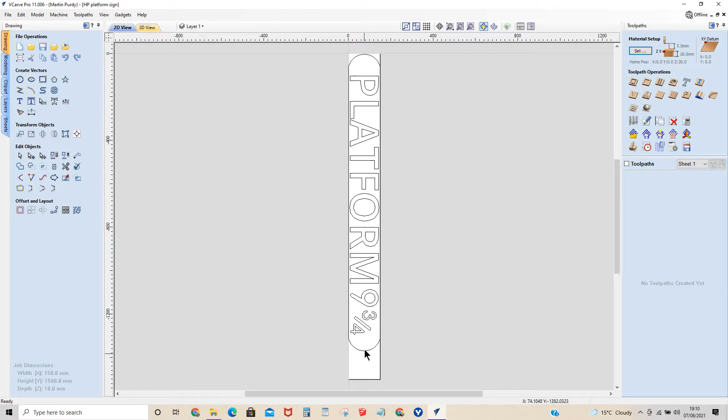What I'm actually going to be using is a piece of wood effect anthracite coloured MDF 18mm plinth left over from the kitchen. The offcut I have is 1500mm long, and the sign we're actually making is 1364mm end to end, like that really matters, and the letter width is around about...

So I've saved you - see what's going on there. As you can see, 21.97, so it's thereabouts 22mm letters, which I think will look quite nice. And we're left with around about 10mm space at the top and bottom of the actual plinth.

And the tool path I've asked for is just going to come around and clip the edges of this plinth. So what I may do is make this fractionally bigger, just so it doesn't quite touch that plinth.

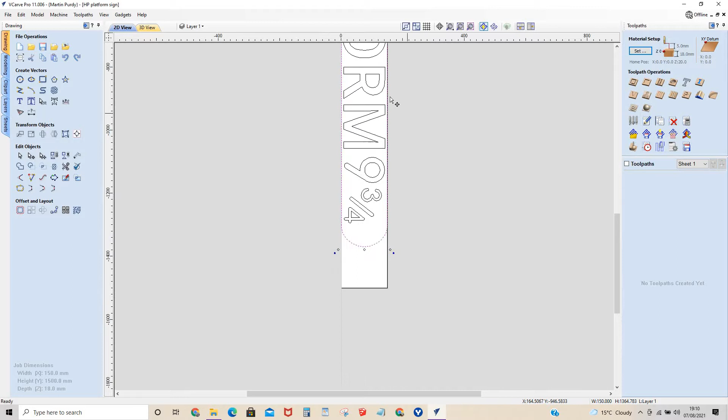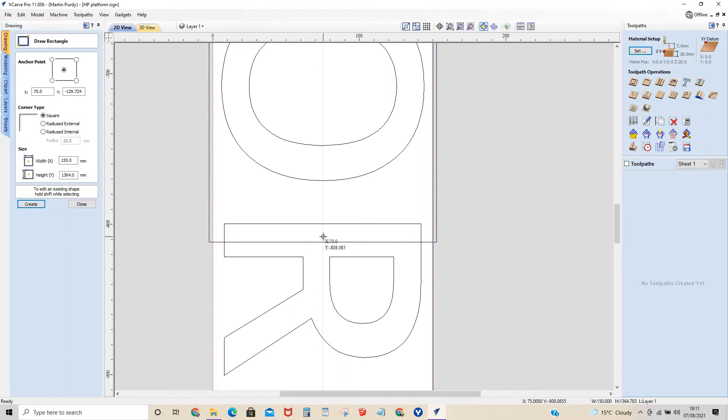So what I've done is selected just this square section, and I'm going to go back into the square generator. So originally what we were looking at ended up as 1364mm, and I want that to be 155 across the x-axis. So if I press create, that's given me a whole brand new square. Right, okay, so we can work with that, that's not a problem.

Oh, I always end up doing this - close that, delete that one. I don't know why now, it's selected this one, it's not just actually applying it to this shape. It probably has something to do with the radiuses. I want a 75mm radius.

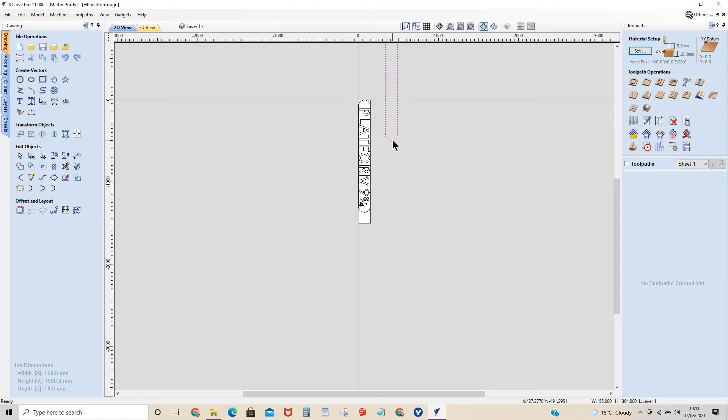Then what we can do is select this, hold the shift key down and select this one as well, open this up, and now we will center the two together. You notice our new one is fractionally bigger than the big one. Select that, press delete, and that is our new tool path.

So if I ask it to cut on the outside of the sign, what we're actually going to do is miss this by sort of 5mm, and I think we can probably get a bit better than that. So let's go back to the square status. Now you notice it states apply, so I can actually apply whatever we're doing to this.

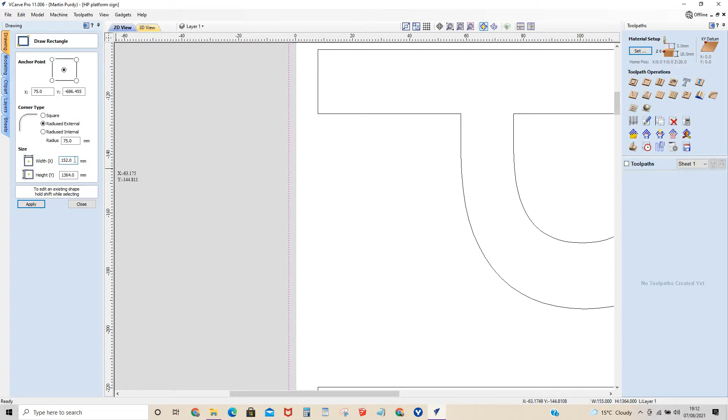152.5 - there we go. And the fact that it's centered, that should have auto-centered off of the sides. So we're going to bypass these sides by 2.5mm. That will give us an ever so slight angle on the radius here.

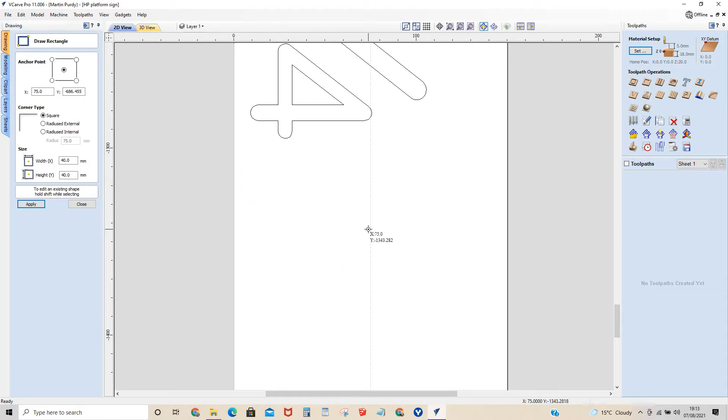But the reason I've done this is we're going to have some holes at either end, just to mount this. So that's the only real last part of the toolpath I need to do. What we'll do now is make that, say, a 40 by 40 square edge, apply - oh, I know what I've just done. 40 by 40, create that there. What we can do is use that 40 by 40 just to give us some sort of space in regards to where our holes are going to be.

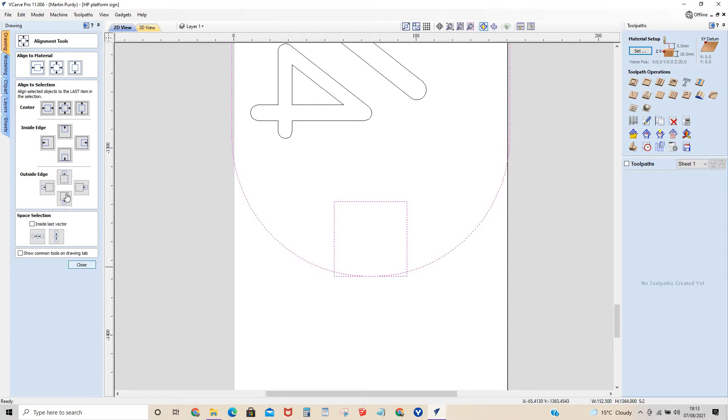So what I want to do is generate a hole somewhere in the diameter of about 5mm, and we'll create it there.

Okay, so I can actually zoom all the way out now. I've created that hole, I've selected our square, and hold down the shift key, select the outer circumference, hold this one, and you notice that's just pinged it straight up to the end, matching exactly where I wanted it.

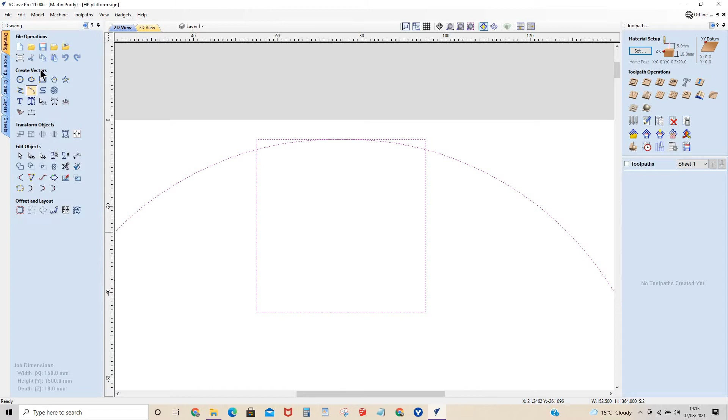Now again, we've got the circle, we've got a 5mm hole. You notice the snap feature is bringing us up this little crosshair with the dotted line running through the center of that square. So I press that, and again it's going to give me that hole perfectly spaced.

Okay, so I've got a perfectly spaced hole down here, perfectly spaced hole down here, and the only thing I can see is where we've shuffled around with these squares, it has slightly knocked all this out of center.

So what we'll do is we will select the outer circumference, we will select that little 5mm hole, press G for shortcut on the keyboard, and to be honest, all it really took was just to bring it in just one click maybe.

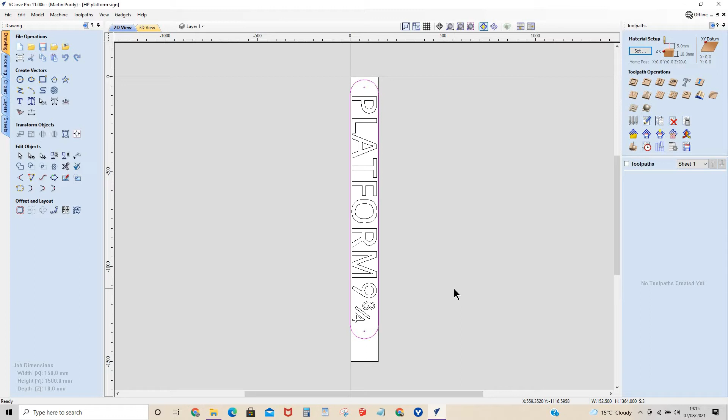So you can hold Control, and Control will give you some very fine movements as you press up and down on the directional arrows on your keyboard. You can hold Shift and that will give you much bigger passes, or you can just hold the arrow and press the directional keys, and that will give you some medium passes. But I think sort of at face value that looks pretty good, so I think we'll go with that.

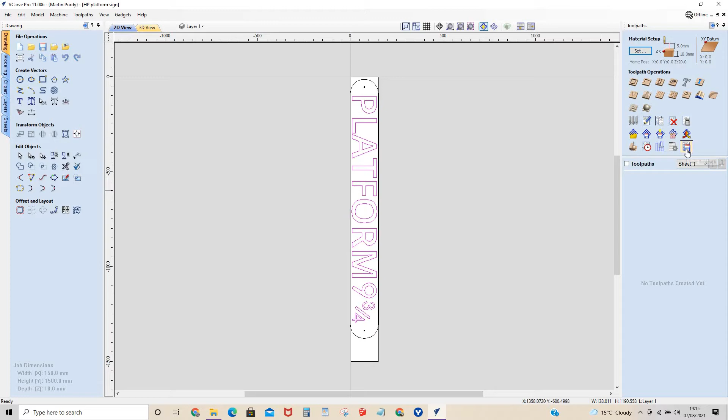So what we've got left to do now is actually generate the tool paths. Now this is where I've been having the most amount of problems with Vcarve Pro. What I'm finding is you actually have to create a toolpath, save that off as one toolpath on its own. So every single operation is one toolpath on its own.

Whereas I used to be able to say create like a bulk amount of toolpaths for anything that had the same tool, whether it was profiles or pockets, it didn't really matter. Whereas obviously now I'm noticing that I'm having distinct issues.

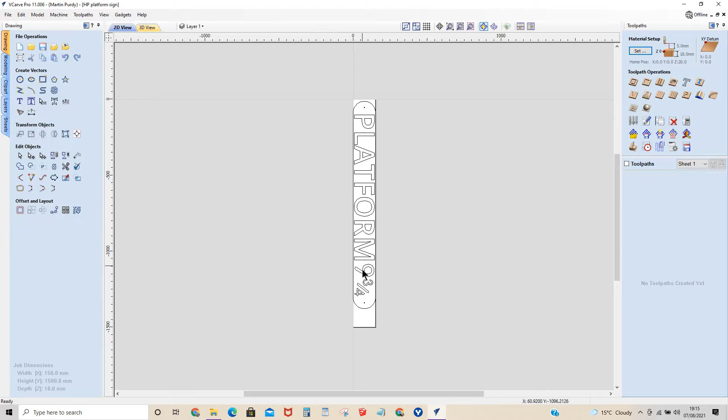So we know we've got the thinnest part. Just measure that off here, there to there - 7.59, so just shy of 8mm going across here. Something like a 5mm cutter would work out absolutely perfect.

But what we're actually going to do is we're going to V-carve this into the MDF. So if I select all of this, which I've grouped all these items together using the shortcut G on your keyboard, I'm going to go with my trusty Trend Rota-Tip, which is a 90-degree V-carve.

Okay, we've got a spindle speed of 24,000. I'm happy with that. Feed rate, I'm going to go for 1200mm a minute feed rate. I've heard of people going a lot higher.

The maximum diameter across this cutter is 17mm. Like I said, the angle actually works out to be 90 degrees, so it's 45 degrees to the center of the cutter, 90 degrees going that way. Final pass will take off 0.34.

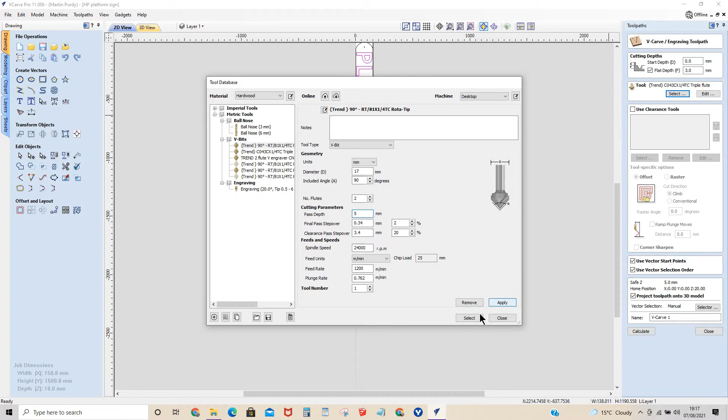I'm going to take a maximum cut depth - let's change that to 5mm. Okay, so we're going to apply those settings to the cutter, what we've asked it for. We're going to press select. So, in theory...

We can now look at the idea of creating a clearance pass. Now, for that clearance pass, I'm going to hog the majority of it out with a terribly cheap straight 6mm by 20mm Toolstation twin fluted router bit, basically a very cheap router bit. Don't mind if I snap these, it really doesn't bother me. So that's a 6mm in diameter, 2 flutes.

We're going to go for a cut and pass depth of 2.5mm per pass, I think that's fine. Step over 2.5mm - so again, let's change that to a 50% step over, because the V cutter is going to come in and do all the nice cleaning up. So maybe we can even push it to a 60% step over, 3.6mm. Spindle speed of 23,000.

And a feed rate of 1200. Now from experience I'm going to lower that to 1000 because I can always adjust it up slightly on the machine. Okay, we'll apply those settings and select that.

So what we should have, when we press calculate, is 2 separate tool passes. What we've got here is I want a ramp, with a 10mm feed into the ramp. As the cutter comes into motion, it's going to travel across this way, then come down as a ramp into that. Slightly slower, but for the type of cutter I've got in there, that's much happier. Okay, so I think we're pretty much done.

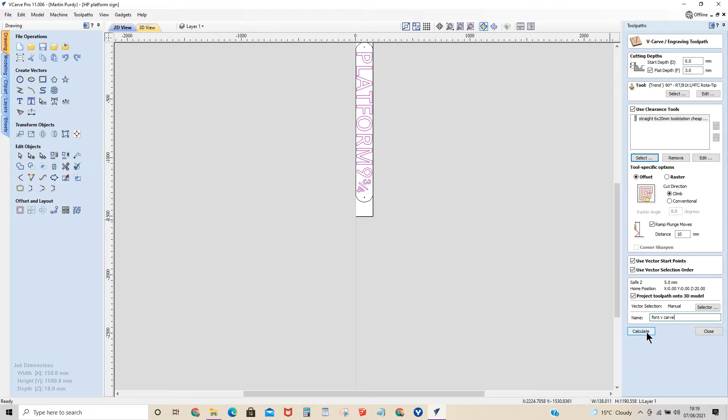So font Vcarve is what we will name this. We press calculate, and that's going to give us two distinctly different carves. So if we look at just the clearance pass, we'll reset that, and ask it to play.

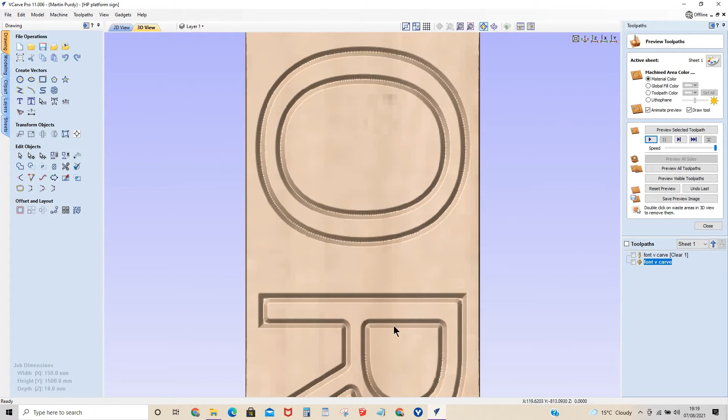That's effectively what it's going to look like. So I don't know why it's not going to touch the center, unless maybe that is a pocket. We'll have a look at the Vcarve itself, and press play on that.

Preview all toolpaths. Okay, so that's going to give us that 90-degree piece in the bottom, and for some reason we've got a flat bottom on here, so let's go and have a look.

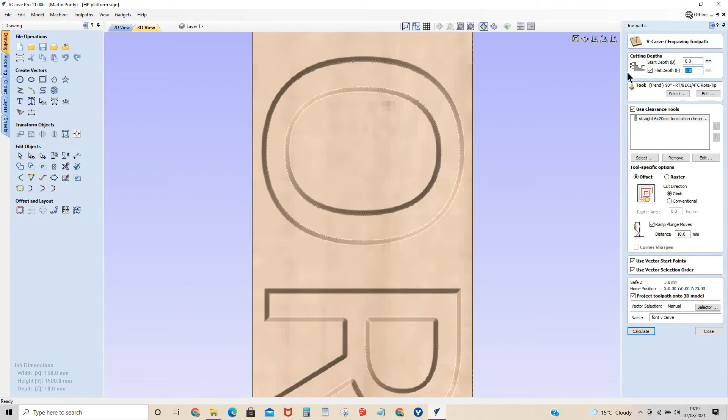Flat bottom of 3mm. So let's take away the flat bottom, and it will probably tell me that the material is not thick enough. Oh, I don't know, it's only 18mm stock, so let's just make sure.

I mean, that looks pretty phenomenal, let's be honest. So let's just make sure that we've already told it that it's an 18mm thickness. Okay, so the fact is it's accepting that at no flat depth.

So let's have a look. Let's have a look at, say, creating a flat depth at 15mm. Let's see what that does for us. Let's zoom right in here.

So I wish there was a way, unless I'm being completely daft, but I wish there was a way of it telling you what height, sorry, what depth that's going to end up with. Yeah, couldn't tell you. Okay, so we're going to calculate that.

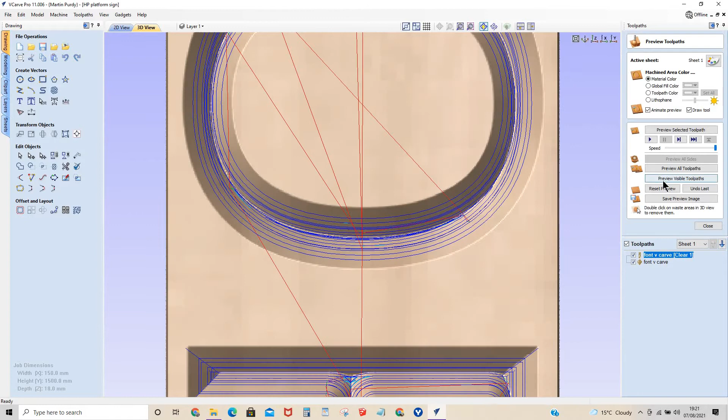So if we press play and ask it to show us, I mean, that's pretty cool, eh? Pretty cool. Right, so what we're going to look at next then is we go back to the 2D plan.

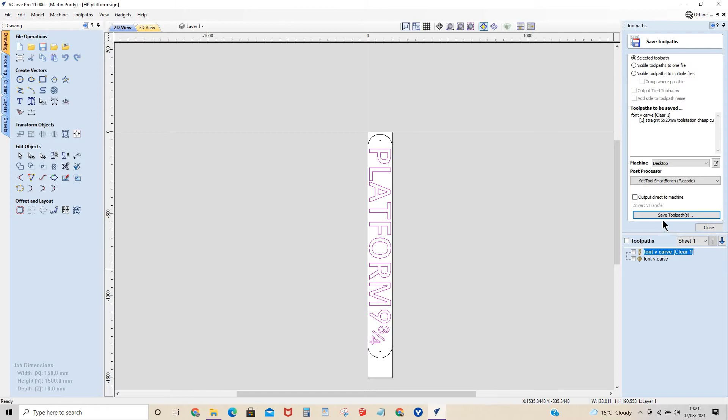We're going to have a look at, in fact, let's save that as a G-code. Save that off first. We'll have to, again, save these as two completely separate files. So CNC plan, G-code files, new folder.

No. So I'll just save it as platform. Right, so we've got font Vcarve clearance, clear 1, and on the end of that we will put, if I can spell right, font Vcarve clear 1 platform.

And that's what it will look like then when it goes over to the Yeti. And then we'll save this toolpath, and then right, hang on a minute. I think because that was blue, that's the bit it's actually going to want to save. And this, I think this is where I've been having the problems.

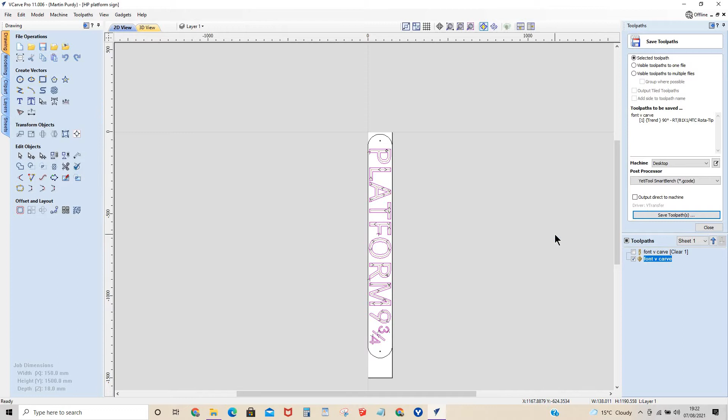So font Vcarve, yeah, font Vcarve platform, save. Okay, this is a one-off sort of piece. I'm not going to be replicating this, so I'm not too worried about adding in all the tools and all the rest of it, because it's enough that I can remember.

So we've got a 6mm cutter here, and the first thing we're going to do is group these toolpaths. Okay, I want to select, hold shift down, remember I've selected one. I need to hold shift down now and then select the other, and you'll see now I have both of them selected at the same time. Okay, I can press G and you'll see that they've changed now to a solid line because they're grouped together.

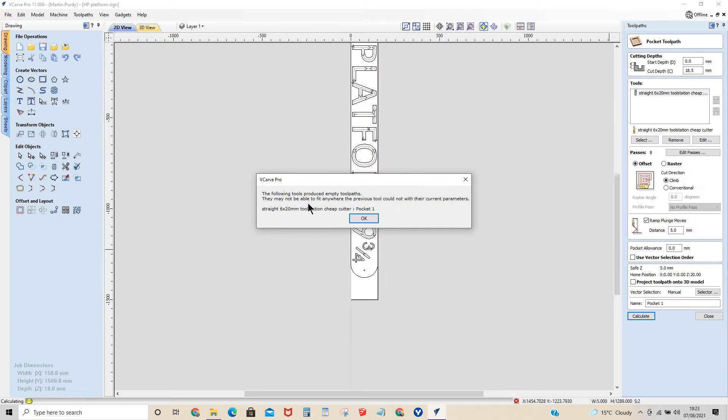Okay, now for this toolpath I'm going to be doing inside the line. How is this going to work? I'm just going to do it as a pocket, 18.5mm deep, 8.5, use that straight cutter. See what it says: the following toolpath... no, it's an empty toolpath because I've asked for a 5mm hole and I've got a 6mm cutter.

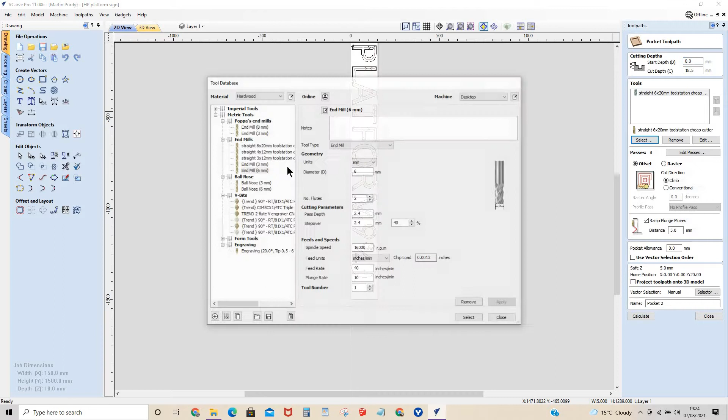Oh, I know what I've got - I've got some 4mm cutters. Let's go for... make sure I still got those selected. Yep, so I'm going to go for a pocket cut again, and I'll change that to a terribly cheap Toolstation, absolutely terrible cheap cutter in a 4mm. We'll remove the 6mm from here. It doesn't matter what sort of type of cut.

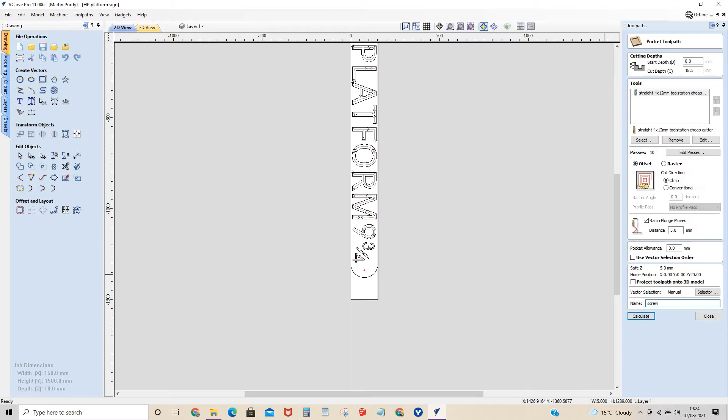And yep, we want it to cut for our material. That'd be ideal if you could. So we're going to take away all of these. Okay, and then we're going to press save on this toolpath.

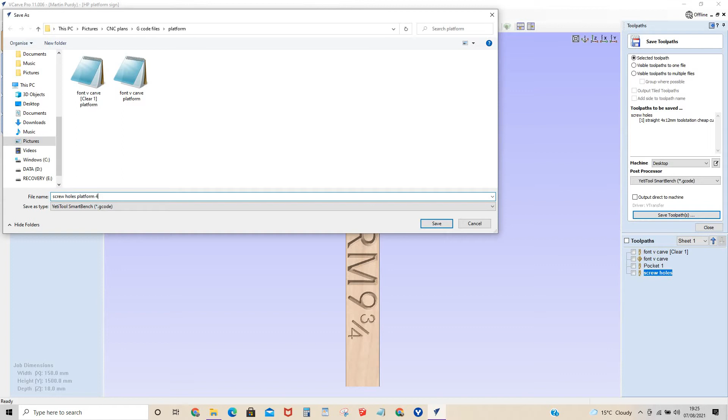Now we've got screw holes. And I'm going to put 4mm on there as just a reminder to change over to a 4mm bit. And the last toolpath is going to be this outer cut.

So we want that as a profile cut. We're going to cut on the outside of the line. We are going to do that as a climb cut, so we'd be cutting this way round instead of a conventional which goes this way round. We are going to add some tabs.

So I've been having, again, a lot of issues with tabs in regards to thickness, and I think I've just noticed what the problem is - 3D tabs. That's where I've been having the issue, because it gives you such a tiny little bit, especially something soft like an MDF, it's pointless. So, thickness, length of unselected 3D tabs.

We're going to ask it to edit tabs. Do I need them 10mm thick anymore on a 9mm? So let's go for, I don't know, 8mm, 15mm length, who knows.

Right, edit tabs, and I'm going to add a tab, tab, and tab this end. Okay, so I've got a fix in here on my board, and I've got a fix in here, just sort of fixed into the spoil board. So again, we're going to go tab, tab, and tab. Hopefully, like I said, screw up here into my spoil board, and a screw down here.

Okay, so that should be enough then with those 3 tabs just to keep that in place while it does the profile cut. Do a separate last path. Why not? Allowance, say 0.3 of a mil. Okay, and this would be outer edge cut.

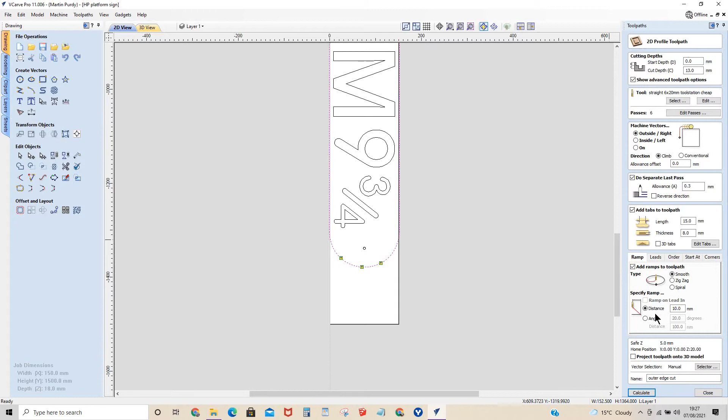Okay, so once you understand all of the different sort of features that Vcarve has, you can really use it to work in your advantage. Oh, one thing we didn't look at was the depth of cut.

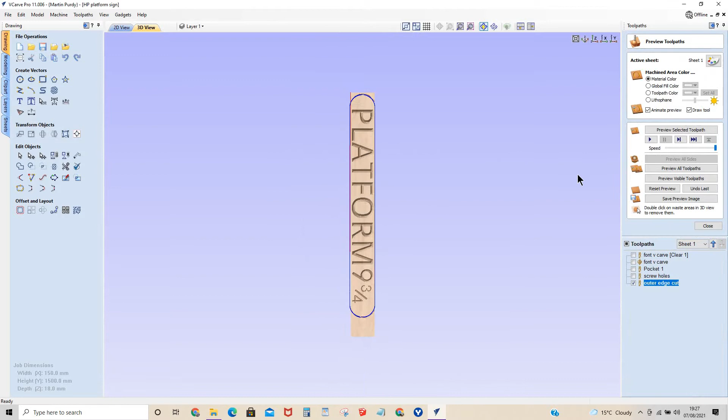18.5 is what we'll go for. Yes, it will cut through my material. That's exactly what I would like. So what we can do is we can select all the toolpaths here.

Okay, so that's the one I've pressed there. Oop, yep, that's the one I pressed there. I always press reset preview. What we can do is we can press preview all toolpaths, and it will run us through all the toolpaths.

Now, if I didn't have any tabs, what I can actually do is double click on the waste, and it removes the waste for you, so you just see physically what you're left with. So on a big project covering a lot of screen, that'd be fantastic.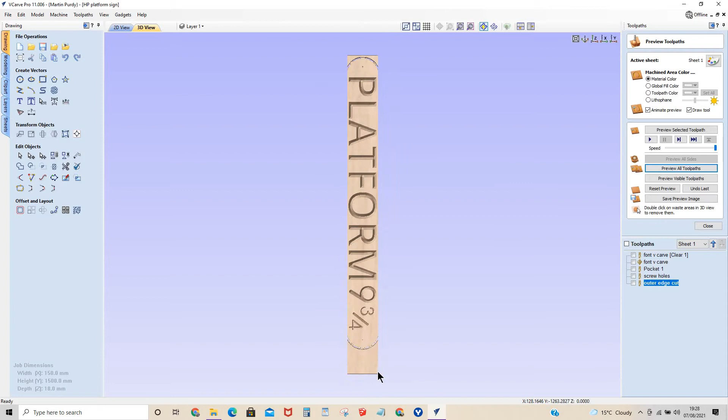But anytime you add tabs, you click on it, you get this warning message. The warning message is basically saying - I find it so difficult to zoom in from this preview. So what it's actually saying is that these tabs... let's see if we can pull this round a bit for you. There we go. Nope, still can't zoom into it.

These tabs here effectively are creating a bridge, yeah? But that's what our sign's going to end up looking like. I hope the lucky person who gets it is going to be happy with it. It's something I've just kind of really made up on my own.

So now we're going to look at saving this toolpath. Yep, so I've selected that in blue. Now again, I can't seem to get rid of this blue. I don't know if it's something I'm doing, something I'm not doing. I don't know, but I can't really seem to get rid of this blue. But what I'm finding is whatever is selected in blue... okay, all sheets, I don't know, can't get rid of this blue.

No matter what you select here, when it comes to saving off your toolpaths, you can select all three and what it'll actually do is save 3 individual toolpaths, all doing that, and that's it. I can't get rid of it, so I find it really frustrating.

So what we're going to do is select what's pocket 1. What was pocket 1? Got screw holes, got outer edges. Pocket 1 - straight 6mm deep toolpath. Close.

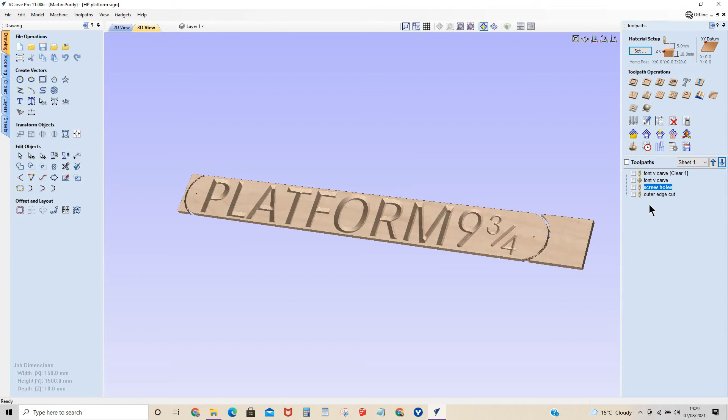I don't think we're using that. That was the one that had the hollow toolpath for drilling a 5mm hole with a 6mm bit. So outer edge cut - this is the one we want.

I will tick that, but at the same time I've got it saved there in blue. And we're going to go to save toolpath again. Now what we're going to go for is outer edge cut platform. So when it goes over to the machine, I'm looking for all the ending text - it's in platform, but obviously this one. And I'm going to be doing it in the order of Vcarve clear, Vcarve, screw holes, outer edge cut.

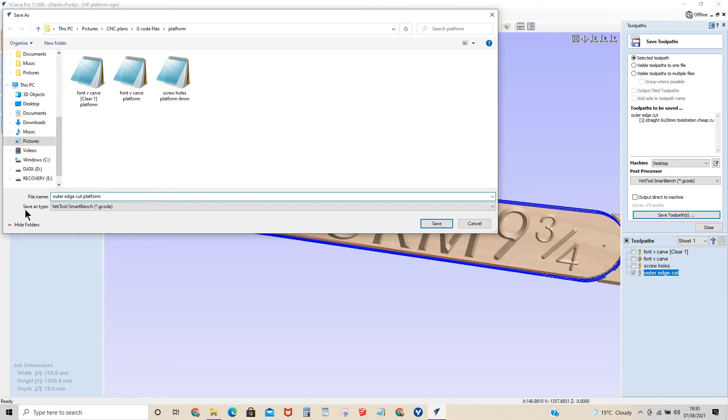Okay, so Yeti comes with this fantastic piece of software, which is their transfer tool.

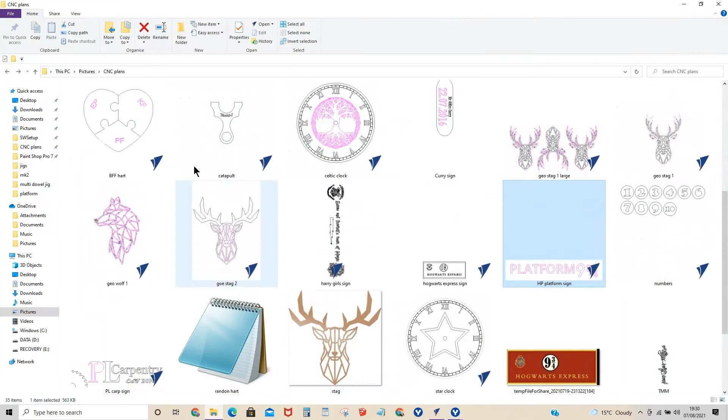Okay, so I'm going to select my Smartbench. What it does is it brings you up this screen here. I'll go into my G-code files and platform.

And what you can actually do is select, holding shift down, using the directional arrows on your keyboard. I'm going to select all 4 toolpaths and drop them into the transfer window. And what you'll find now is all files have gone across.

Now that I've recorded, you can hear me talking, that I've recorded in real time, so you can see how fast that's taken across. In all fairness, they're all very small files - they're not big files, but that's taken across very, very quickly.

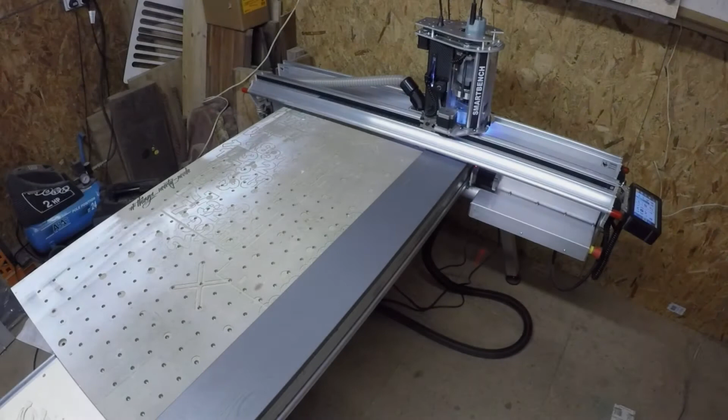Hey guys, so we are over at the Smartbench now. Going to be looking at cutting the platform 9 3/4 text into this wood effect plinth. I don't know if you can see it - it's a foil wrapped MDF. Has actually got a stamped wood grain effect in it.

It's really nice stuff actually. And then what I'm going to do is paint these outer edges once it's done, just to sort of finish it off. So this is going to be our X and Y 0.

Okay, and I've already set the Z axis for the height, but I am expecting it to tell me that I've set this too high. So let's have a little look.

So I've set the beam, the X beam, 6mm off of this surface. So it's not actually in contact with the surface in any way, because I don't want the little wheels to risk marking the surface. So what we're going to do is come along here.

I'll just move you back slightly. We're going to come along here, and I'm going to attempt to position the laser. Now, I don't know if the camera can see it, so with my very shaky hands, I'm going to bring you across.

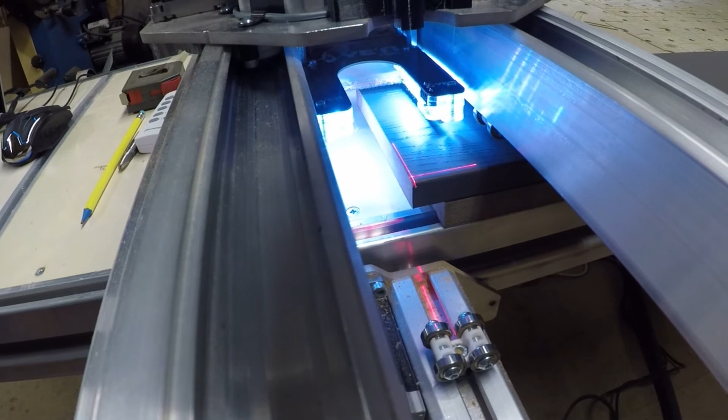Now, what we're looking for is this laser to be bang on to the outer edge. I'm pretty happy with that.

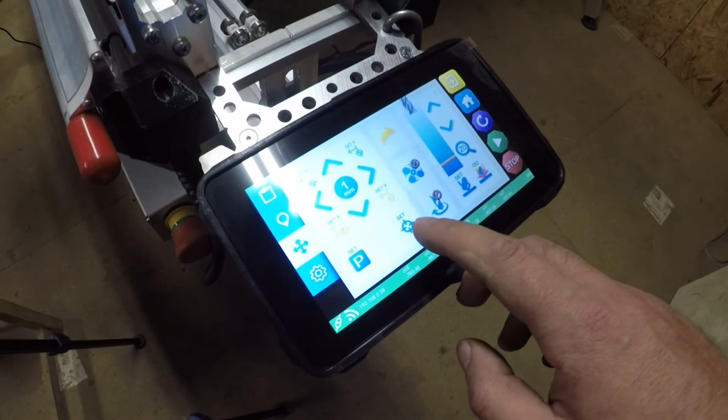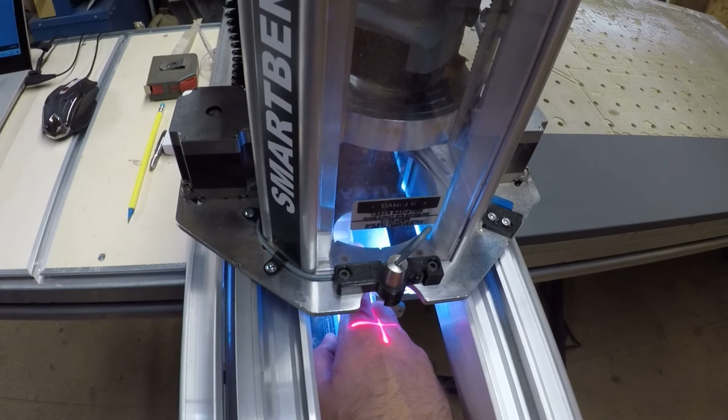Okay, and what we're going to do is press on the control panel, set X and Y datum. So what that's now done is it's brought the cutter over the corner. Don't know if you can see my little fingertip - it's brought the cutter over this corner now to the centre, now centre of our X and Y datum. So that's dead smack off of that laser.

I absolutely love the laser.

So we're going to go now into our files, and the first one we are looking for is font V carve clear platform. So we should, once we find them, find all of the platform files together, I should imagine.

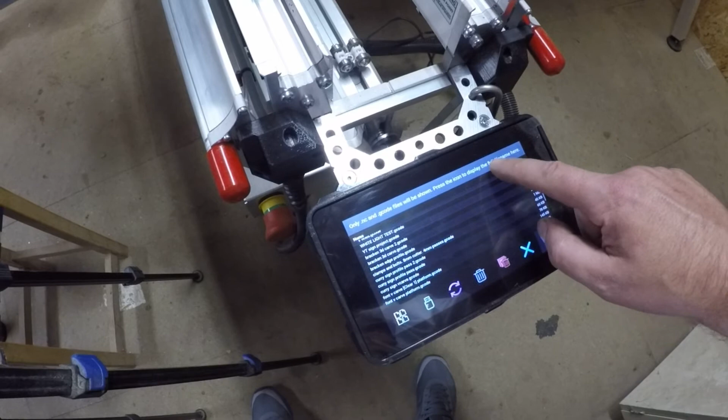This is all the files I've got on here. I need to have a bit of a clean out.

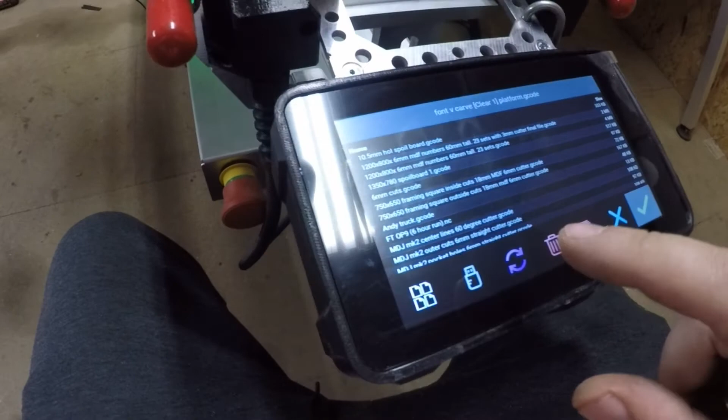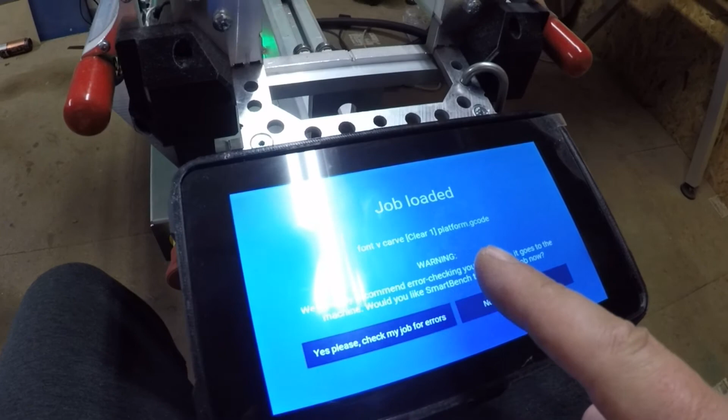Okay, so at this stage I found my file, which is the Vcarve Clear 1 Platform G-code. I'm going to press yes, that's a tick. Now it's preparing the file, and I'm going to ask it to check for any errors.

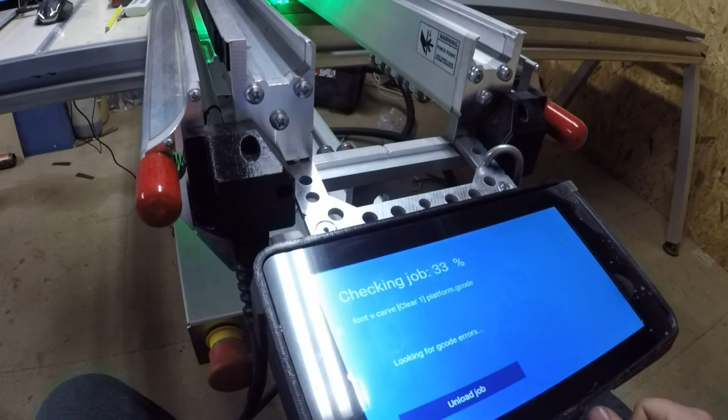Now on this file I didn't actually ask it to put the white light on, so we've still got the green light. Aaron and the guys at Yeti have managed to get everything in place for me to change all the lights to white, which I find a lot easier to see the cuts, and a lot better for filming. However, I'm not going to lie, I clean forgot to do it.

So now we've got the file loaded, I'll bring you to a screen here. I hope you can see that properly, where it's showing you where the workpiece is in comparison to the SmartBench, which I think is a brilliant piece of engineering in itself.

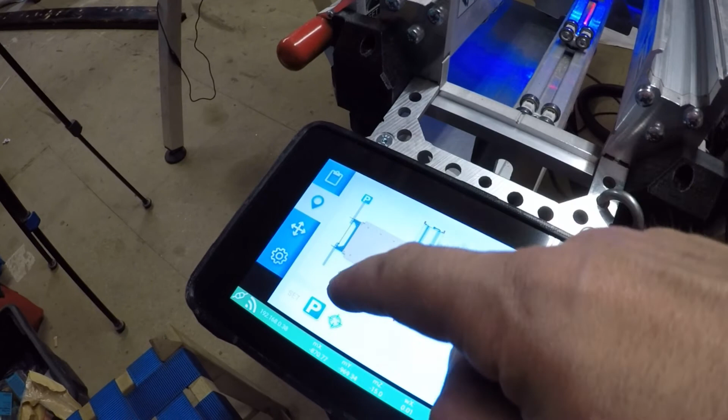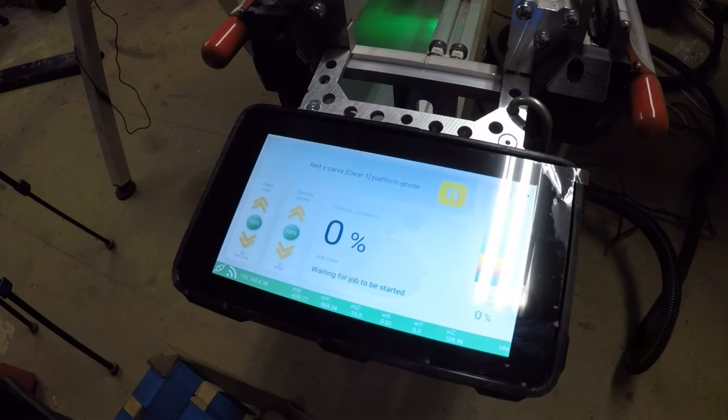So what we're going to do is press play down here to say we're happy for it to start, and we understand. Now we've got a depth of cut here, so as you can see we've got our feed speed and our spindle speed. We can adjust those up and down as the job's running. So it's just going to turn this off down.

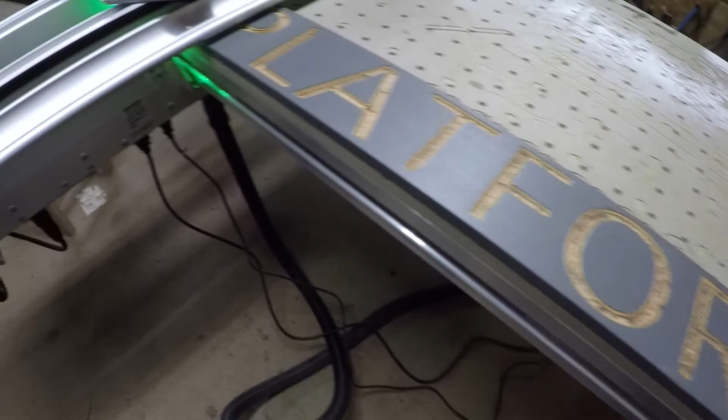So let me give this a little bit of a clean up, just bear with me, trying to do this one-handed. This is a cracking idea of mine, Hoover on remote control.

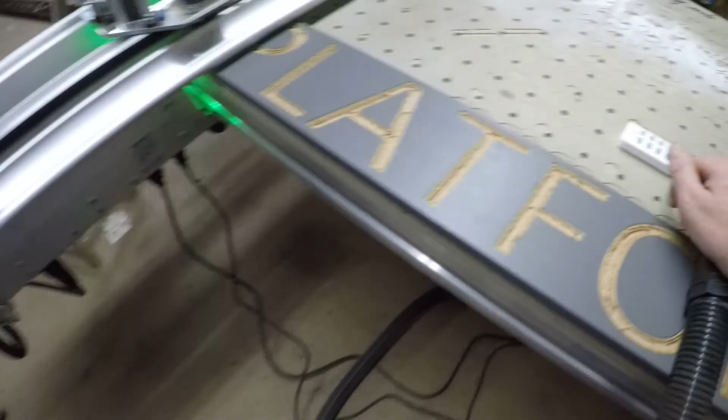There we go, there's the dust port connection for the actual Smartbench. I'll sort that in a minute.

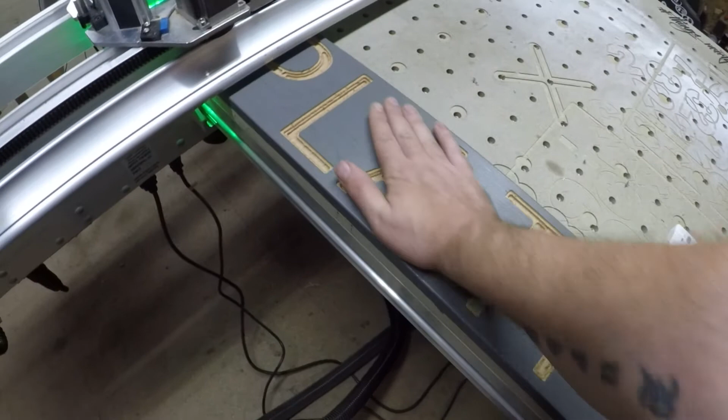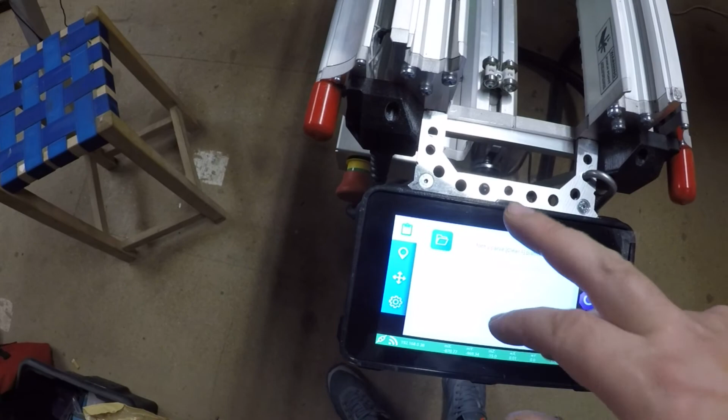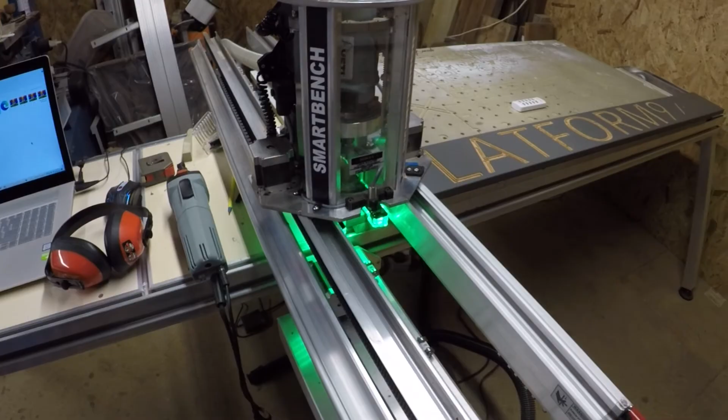So the console's telling me the job is complete, and then we can go back and load the next job. But before we do that, obviously I need to change over to the second spindle. This second spindle has got the Rota-Tip V-bit in. I absolutely love all these different cutters where you can replace the carbide tips. So bear with me one second, I'll just swap that over.

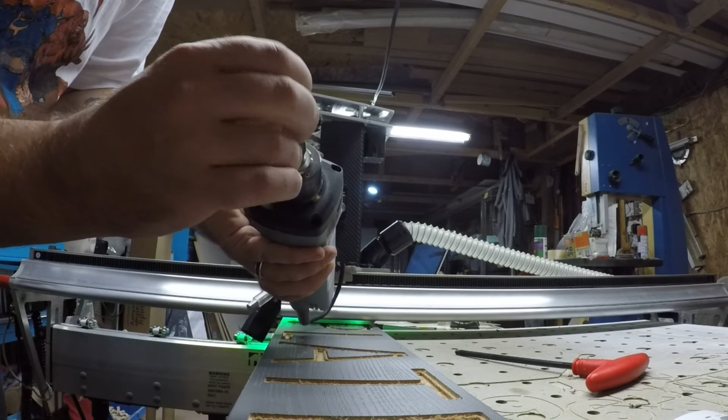So Smartbench comes supplied with one of the adjustable ball end type Allen keys, unplug the communication cable and the power cable, slide it out, and as promised, slightly burnt, terribly cheap, crap little twin flute cutter, but credit where credit's due, it's done its job. Done actually quite a lot of cutting with that cutter, I'm quite impressed.

So we'll drop the new spindle in. Turn it so the red button is in line with this beam. That means the vents can then breathe outside of the machine and keep it nice and cool. Do this up, and as Yeti say, when it gets to the point where you can feel it grip, turn a quarter of a turn past, and that's tight.

Okay, and that works out as so many newtons if you really care that much. Don't ask me how many newtons though, probably.

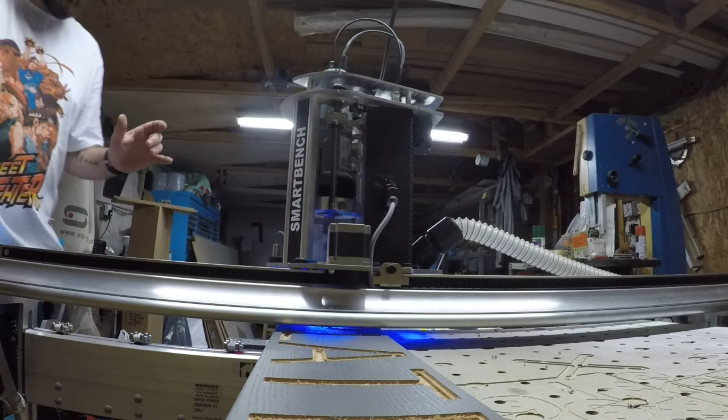There we go, so we just plug back in the comms cable and the power cable. Now at this stage you always have to remember you're going to have to reset the Z-axis because we've got a new tool, a different height. So we set it to infinity mode. Now one of the biggest selling points about Yeti to me was the built-in touch plate. So we bring the Z head down till the tool is fairly close to the workpiece.

Slide in the attachment then. That brings the cutter down fractionally until it touches the touch off plate, and that sets the height. Now even from there you probably saw the light flash green to say that it recognises this.

Now the only last thing I need to worry about is if I've got enough depth on the Z head and the tool to actually reach the bottom of these V-carves. So again, we come in, we select the file we want, which brings us to the tiny writing that my chubby fingers struggle with.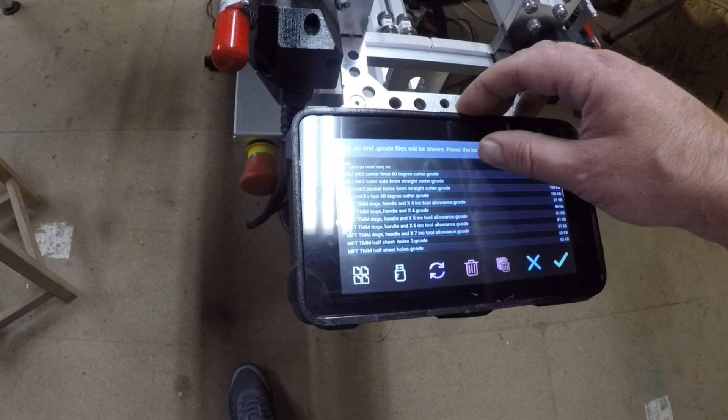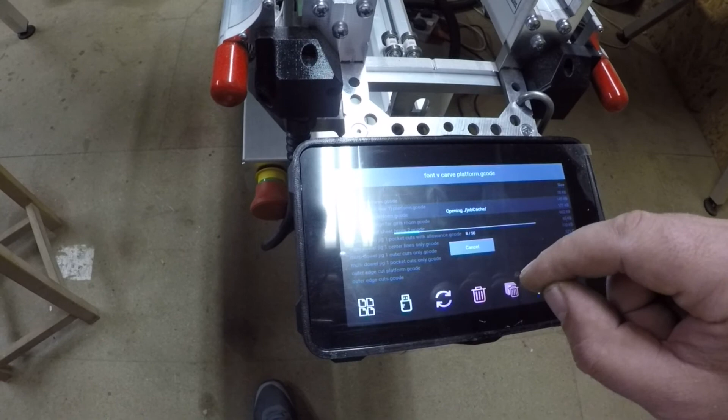So we want Font V-carve Platform. Press that one. Font V-carve Platform. Happy with that? Yeah. Press the green tick.

Now we're checking the job for any errors. At this stage I always give the machine a bit of a check over, and it's always worth looking inside this dust port at the back to make sure we're not harbouring any crap in there.

So it's checked 70% of the job, and it's all quite happy so far.

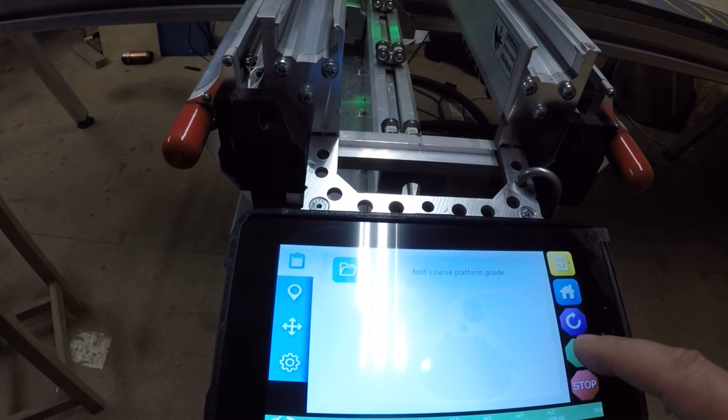Okay, finish. Now it's worth mentioning that if I go back on this screen at this point, it used to show me what I was looking at. Since I've changed over to version 11, V-carve Pro version 11, it doesn't show me on the screen anymore what file I'm even looking at. So when it starts giving you the wrong G-code because of possibly that blue highlighted writing, it's really frustrating.

Okay, so there you have it, guys. That is Platform 9 3/4 V-carved out. Now I went for a slight step over on the final pass as a clean up. One thing I wasn't aware of is I've been left with these witness marks.

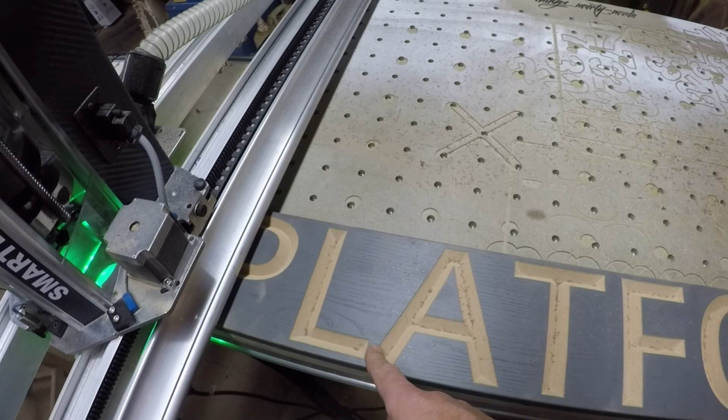Now I know why I've been left with these witness marks. It's because this is a ROTA-TIP tip on this cutter. So this cutter doesn't go all the way up, if you see, there's your cutter, I've got a little tip on the end. I don't have a full V tip on it, so the machine's assuming I do. It doesn't know that, so obviously it's left these witness marks in places.

To be honest, if this is painted, then it's not going to detract too much anyway. That will all just blend in, you won't see that at a distance. So now we're going to drill out the little holes in the end for that to be screwed to the wall. So bear with me and I'll get those done.

Oh, so there you have it, guys. Job complete. So that is our Platform 9 3/4 done. If you look right down in there, you can see our tabs, tab, tab, tab.

You'll also notice that I had to move the screws. So I actually applied the screws below the surface by a few mil. When I'd done the first pass, it was actually just gently over-cutting on the screws, so a bit of terror, quickly got those moved. Look, that one was just as bad, well, not quite as bad, but still.

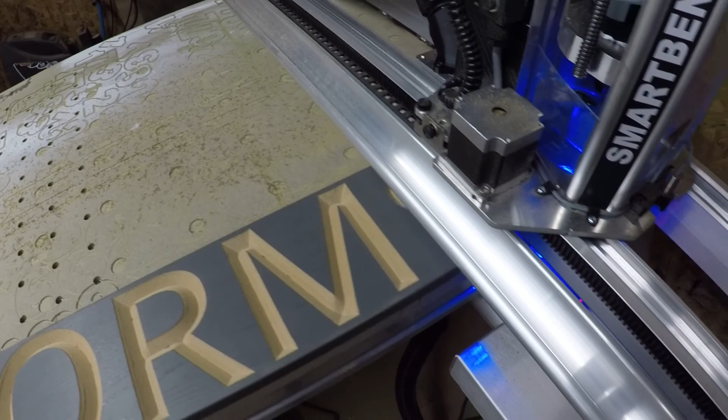What do you think? I think that's V-carved really well. So I'll just move this over here. Right, so I'll just home that properly.

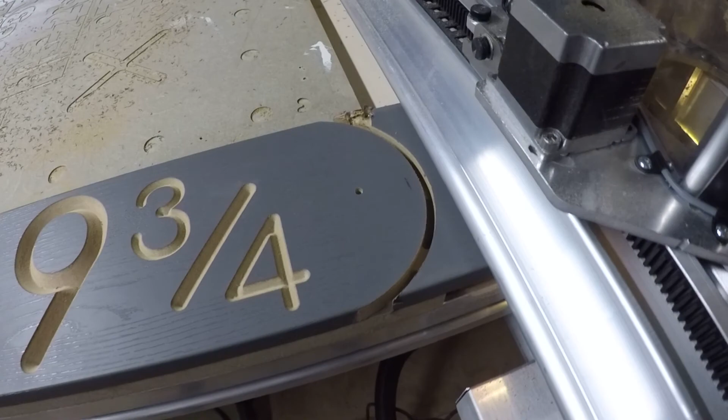Okay, so there's your rounded edges. There is your screw holes. 9 3/4 platform, screw hole, radius edge. And that literally just skimmed these edges. The cutter was just skimming these edges, missing them by sort of 2.5 mil.

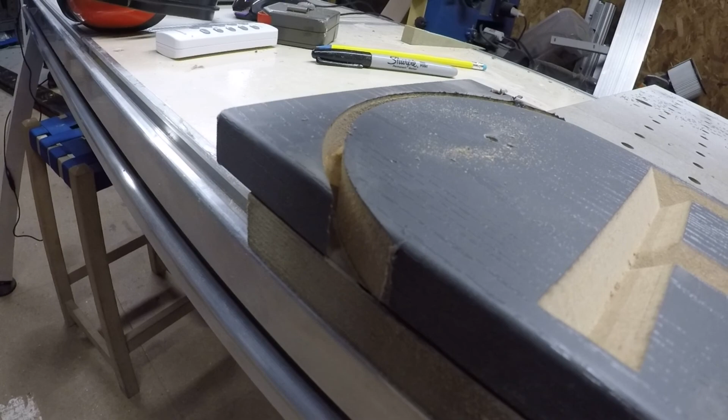Now, I did ask this to cut 18.5 millimeters through. You'll notice, if I can get the light right, just on this edge, it's just skimmed, so it hasn't even touched my spoil board. So it is fractionally out on the Z. However, I'm not complaining, that's pretty spot on.